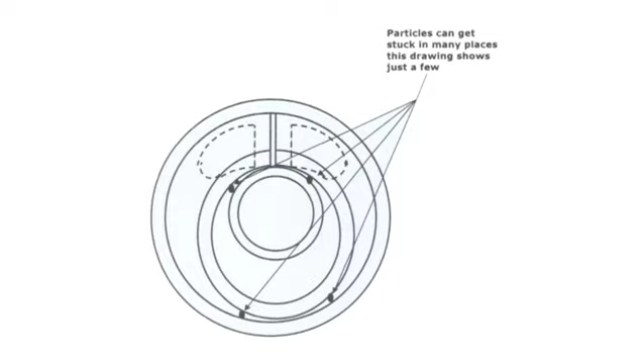As the water enters the test rig, it goes through a 50 micron mesh filter. This removes all the particles that could damage the meters on test. When the meters have passed the test and are certified, this protection is removed. The only protection the meter has is an inadequate strainer with holes hundreds of times bigger than the 50 micron mesh used on the test rig.

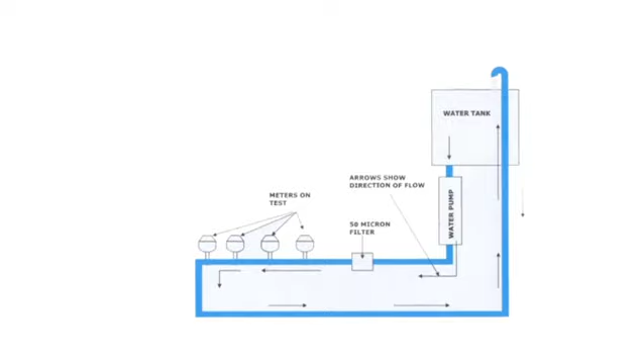Everyone in the industry has known for years that any particle over 100 microns would affect the measuring chamber, causing it to slow down or stop. When the domestic meters are manufactured, meter companies do not test the efficiency of the strainers in their meters to see if they provide adequate protection against particulate matter.

I have a sample of 100 micron mesh here. There's about 100,000 holes in this sample. Any particle over the size of one hole in this sample would stop the meter or cause it to under-record. As you can see, there's a vast difference between the size of the holes in that and the strainer used inside the meters.

Firstly, I'll demonstrate that nothing harmful will pass through the 100 micron mesh.

Now I'll demonstrate how inadequate the strainers are that are used in present meters.

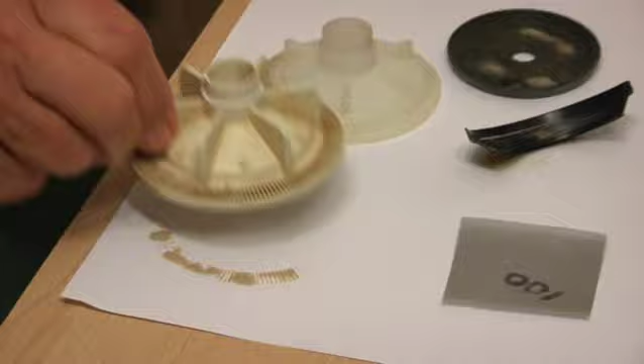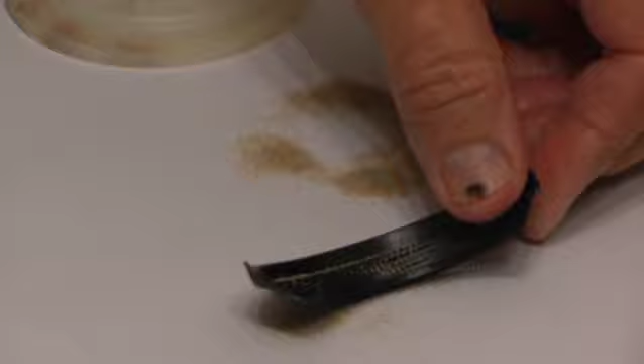When the meter is on test, these useless strainers play no part in the test. Why not, you may ask? It's very simple: they don't want meters to work for 20 years. It's bad for business, and there's a lot of money to be made in meter failures and replacements. Meters are deliberately designed to break down.

Another point the public should know: standards authorities such as British and European standards don't write the standards. They're written by manufacturers. It's self-regulation, therefore always open to abuse. The standard written for domestic meters is an ill-defined and illegitimate standard.

Meter testing is the equivalent of a car manufacturer testing cars in the factory with air and petrol filters fitted to the engine, then removing the filters just before it leaves the factory, knowing it will cause the car to break down. If car manufacturers did that, there would be uproar.

No one notices what's happening with the water meter because members of the public don't come into close contact with them, and no one gets hurt. You just pay the bills, and the politicians don't want to stop it.

A few years ago there was an EU recommendation titled 'Revised Meter Manufacturers Installation Instructions', European Standards Committee CP/30/7/1. It stated: due to the normal filtration processes of the water supply, also because of circumstances beyond our control, gritty particles are naturally found in all water flows. To ensure that the meter works in accordance with revised European standards, also to maintain its maximum accuracy and reliability, it is imperative that the meter measuring element is protected by a 100 micron stainless steel mesh strainer fitted upstream of the meter. All guarantees will be null and void if these instructions are not strictly adhered to.

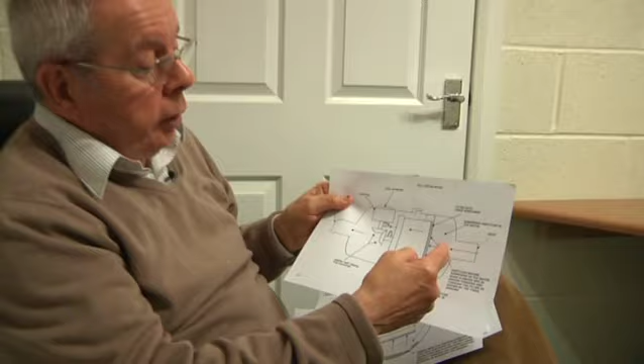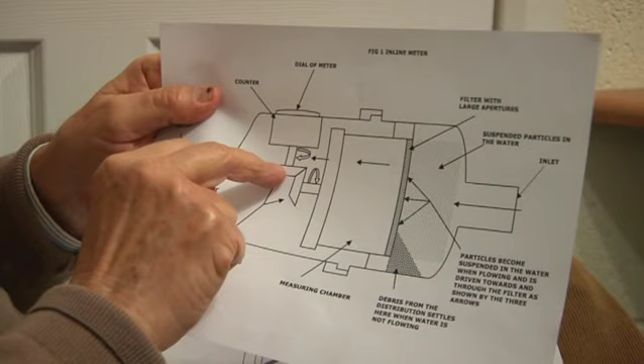The water comes in here and brings the particles in with it, and when the water stops it begins to pile up at this point here. There's the strainer, so when the water comes in next time, any particles in this area agitate and go through the strainer and get into the measuring chamber. This measuring chamber has a drive here which drives another gear there, and that turns the counter. This is another type of inline meter.

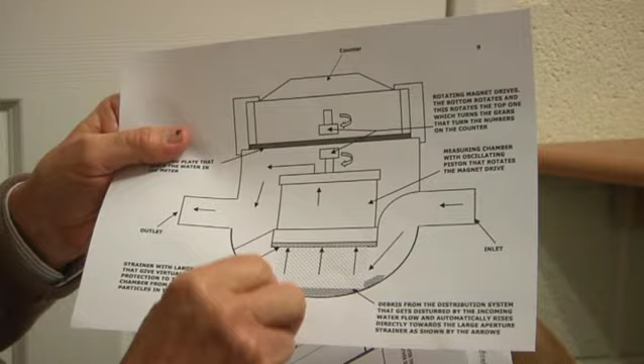The water comes in here, underneath the measuring chamber. Any debris left in the bottom gets agitated each time the water comes in, and is forced through the strainers and into the measuring chamber. It then comes through the measuring chamber and out the outlet.

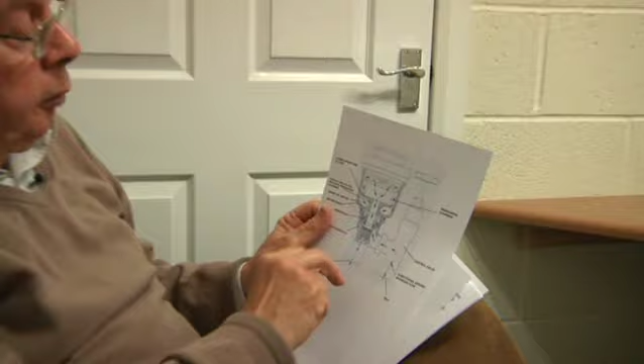It is usually in the meter box outside in the pavement. The water comes in here, goes through the bottom of the meter, through the strainer at the side, over the top into the measuring chamber, and then back down through. But the strainers are so wide that particles are driven over the top and into the measuring chamber.

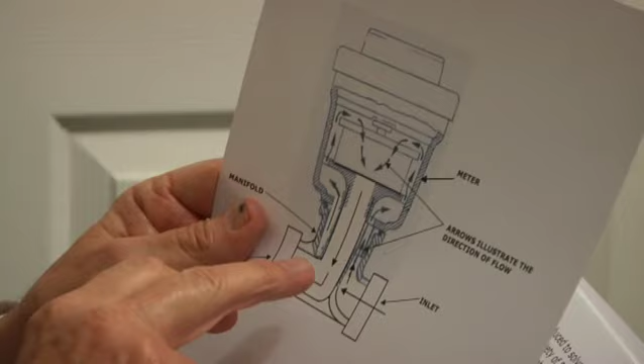This is the manifold meter mounted inside. It has just a normal manifold. The stop taps are on either side, but it still works exactly the same way. The particles get up through the top and then go into the measuring chamber and stop the meter.

In 1994, Schlumberger, one of the biggest manufacturers in the world, carried out tests on all domestic meters available at the time. This is their report. It concluded none of the meters, including their own, could cope with particles over 100 microns. In other words, they were not fit for purpose.

They recommended a filter based on what I had produced to solve the problem. This report was presented to the Society of British Water Industries, SBWI, in Leamington Spa in October 1994. This is written evidence that the industry and government have known about this problem for at least 17 years.

I know that is true because I wrote to the Minister for DEFRA at the time and he ignored my warnings. Meter manufacturers are knowingly selling a product with a built-in fault that is likely to cause it to break down or under-record. I believe this is illegal under the Sale of Goods Act and the meter cannot be fit for purpose. However, to get this stopped, someone has to complain, and no one will except me.

On screen now is a diagram of my version of the Schlumberger test rig. The difference between their test rig and mine is they use a 450 litre tank of water and they put in 500 grams, half a kilo, of grit in the water.

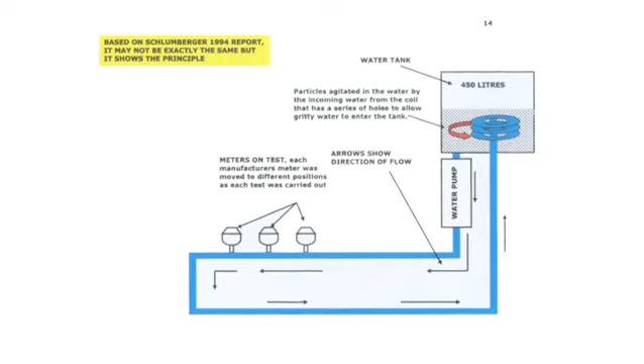This amount of grit was used based on years of experience, having seen the amount of debris in meters that have been in service. I use a 45 litre water tank, 10% of the size, and in theory could use 50 grams of grit in the water. However, the maximum amount of grit I've ever used is 20 grams. That is a 60% reduction in the ratio of grit per litre of water compared to what Schlumberger used.

In this test, at first I will use only approximately 10 grams of grit. That is an 80% reduction of grit per litre of water compared to what Schlumberger used in their test. In theory, the meters should last longer in this test than they did on the Schlumberger test.

The difference between my demonstration and theirs is that I test the efficiency of present meters against a meter I have modified to overcome these problems.

As you can see, there is a 45 litre tank of water and the meters are working correctly. The one on the right is a brand new meter and has never been used before today, and my modified design is on the left. The brand new meter is an excellent design and will work for 20 years on a test rig with no problems. It is when you install it into the distribution system that the problems start.

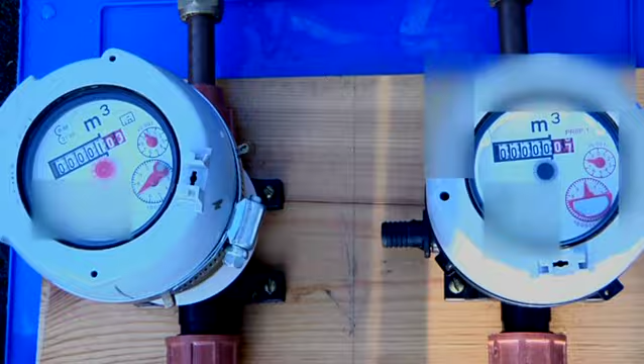There's a little bit of head loss on my design because it is the first prototype and the new components inside are machine made and have sharp edges. This test has nothing to do with head loss - it is to see which design can cope with particulate matter best of all. There will be no head loss with my design when it's in production.

Now I will put approximately 10 grams of grit into the water and, using the stick, stir it all up. I've been told I'm very good at stirring things up. Keep your eyes on the meters and see which one stops first and how long it takes before it breaks down when I stir up the water.

That took less than 10 seconds and yet the ratio of grit per litre of water was reduced by 80%. The grit was divided between two meters and I didn't have control over which way it went. You will also see that most of the sand is still at the bottom of the tank.

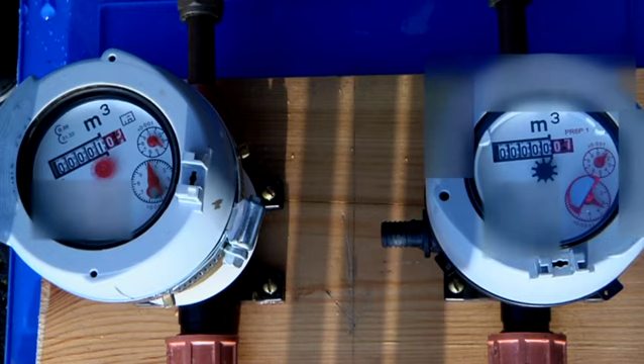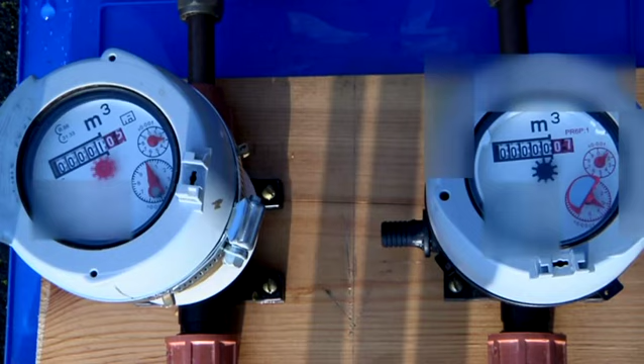Now I turn the valve off, leading it to the broken meter, and direct the rest of the water and grit towards my modified design. I will also add another 10 grams of sand to the water and stir that in to make the test a bit tougher for my meter.

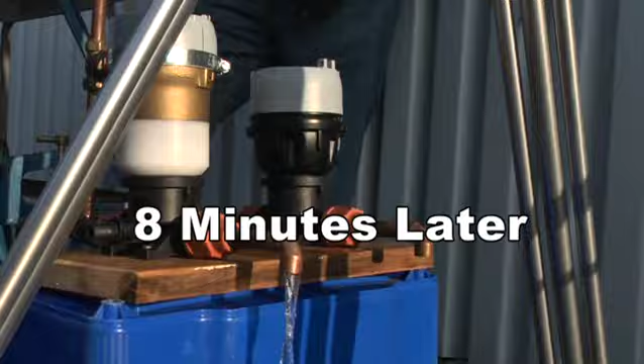Now you can see all the grit has gone into my meter, but it's kept working. My meter is fit for purpose, the other one isn't. My design works and the other one doesn't.

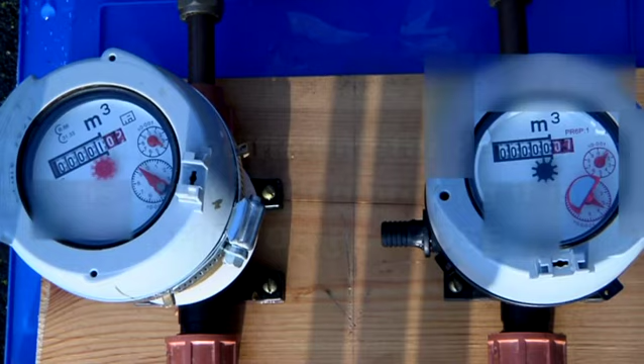When the present meters break down, they're thrown away. You can't repair them or reuse them. It costs £70 or more for each one to be replaced. If the meter has an automatic readout system, AMR system, the total replacement could be over £100.

8 million meters are already installed and should be replaced, and it will cost £500 million. If the whole country, 28 million properties, were metered and we replaced all of them every 12 years, as one company intends to do, this would cost approximately £1.96 billion every 12 years, adding over £160 million per annum to water bills.

I'm trying to stop these extra costs being imposed on the public, but it's up to the public to decide whether to back me or not. The public in other countries should also consider whether they want to have the problems we have in the UK, because their meters will also fail.

I asked 3 questions of our 650 MPs in Parliament. What are you going to do about the 8 million substandard meters already installed? Who's going to pay to replace them? What are you going to do to stop this scam?

Over the last 20 years I've written to DEFRA, British Standards, European Standards, Trading Standards, meter manufacturers, Ofwat and anyone else who I thought would listen. None of them wanted to know.

They won't let me speak to parliamentary committees or ministers because none of them want this scam to become public knowledge or stopped. All the government departments have passed the buck from one department to another for the last 17 years. Not one department is interested in having meters work accurately to cut the costs, and they should be.

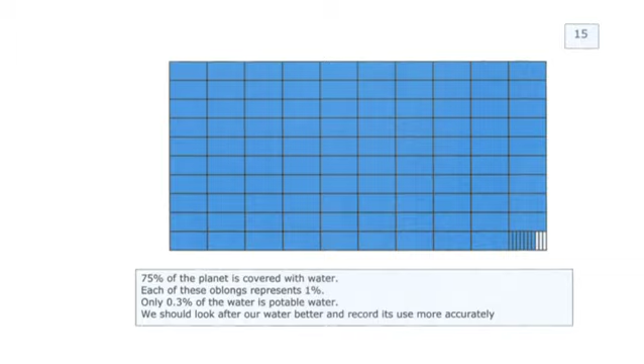If they don't, there is no point installing them. If no one abides by the rules, there's no point having European or ISO standards.

If MPs claim they didn't know what was going on before they saw this video, they know now. I have sent out 986 emails to them direct and to their constituency offices. They are all involved and responsible to their constituents for what happens next.

We have a water metering system that has cost the public approximately £1 billion so far, and not one water company knows how many of their meters are working correctly or if they're working at all at any one time. It has taken 20 years to get this far, and you lot in Parliament have ignored all the warnings long enough.

My advice to all the governments of developing countries, especially China, India and Brazil, who are buying water meters in large quantities: don't make the same mistakes we have in the UK. Make sure that the meters you install can cope with the particulate matter you will inevitably have in your water supply. Make sure that your meters are serviceable without interfering with the integrity of the meter. To make sure they are all aware of my claims, I will be writing to every ambassador I can think of, advising them to look at this video.

All mechanical products require maintenance if you're to get good service from them, even something as basic as a wheelbarrow. The domestic water meter is no exception. None of the mechanical domestic volumetric water meters are fit for purpose and cannot be serviced regularly. As the present meters stop or under-register, they have to be thrown away.